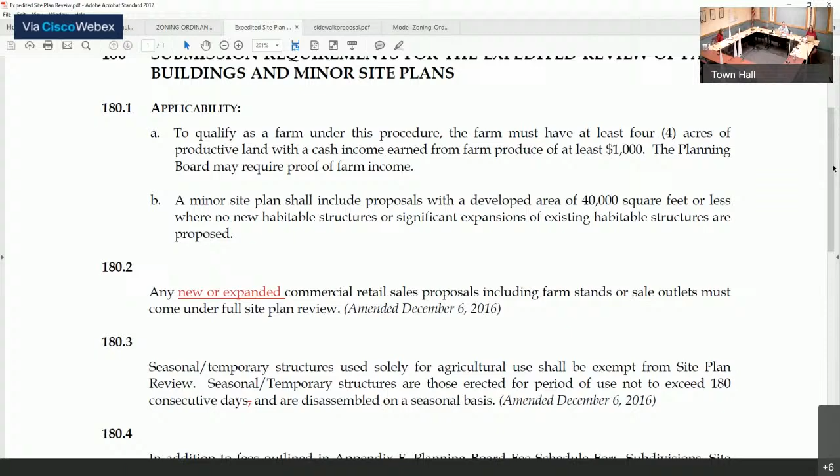And in terms of acceptance, so when we usually do a two-step process, we have the acceptance of the plan, and then we have the conditional approval. So at the acceptance level for an expedited review, are we looking just to, I mean usually we ask, have abutters been notified, fees paid, do we have all the plans that we need? Is there anything that isn't necessary or necessary to do that, or does that change?

That wouldn't change, because section 130, the submission procedures, and section 140, submission requirements, don't change at all. So you would still go through that process. It's just that there are fewer items that you would have to address in your application. So you still have to provide the abutters, you still have to provide a plan, you still have to meet all the requirements, the required renderings, you have to pay the application fee. So all that's still true. And there would be a vote for acceptance. They would still make their presentation, and then there would be an action on the approval. Thank you.

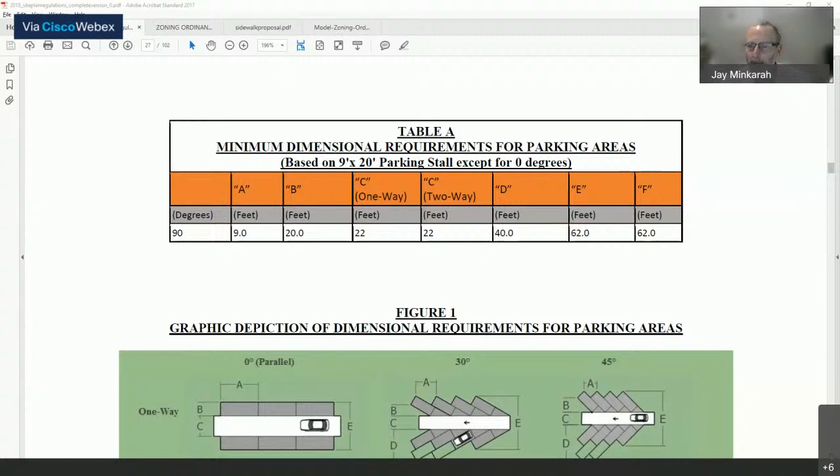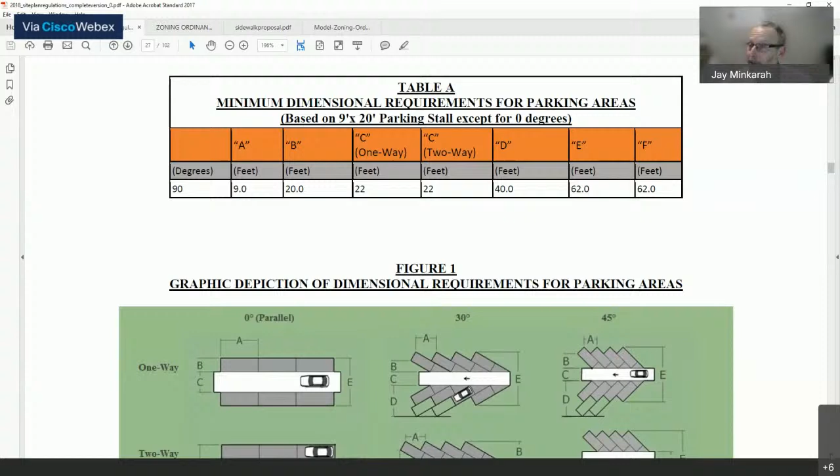And again, I'm happy to share this with everyone. If anybody does have a question as we're going through, and you don't have your regulations in front of you as to what Litchfield's current standard is, let me know, because I do have it open in front of me.

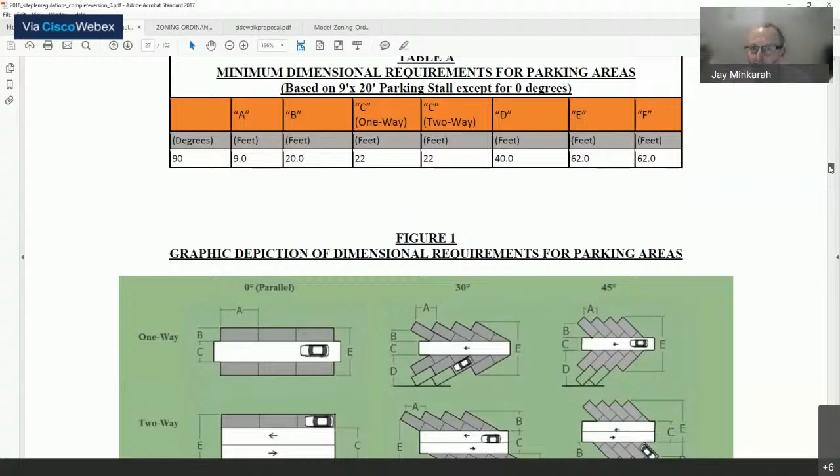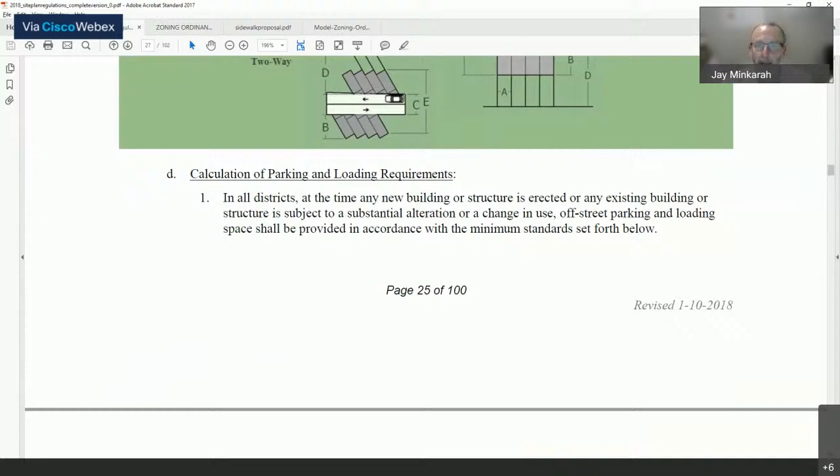Just off the cuff, I think the parking stall size is very similar. We also have some nice graphics on parking areas—maybe we could use some nicer graphics, but overall I think those make sense. I am going to scroll down through all of this until I get to their first tables on off-street parking. And just very basically, these are actually very comparable to the regulations we have now, so not a whole lot of change.

The one that does jump out a little bit is mixed use residential, which is a little bit different. That is not something we addressed.

These again, these are pretty typical as I'm moving through. And by the way, I've lost my visual.

Can people still hear or see me? Yeah, we can hear you, Jay. We can hear you, and we can see the table. Interesting, my active speaker box just turned blank. Anyway, that's probably my problem then.

Nevertheless, a couple here again that we don't necessarily address. Live work unit—maybe we care, maybe we don't.

Where I'm starting to go here, though, is I like how the ordinance in this structure, rather than listing out every single use—which is the way we do it—and providing a separate standard for each, even if they're the same or very similar, the way Londonderry does it is group a whole lot. So this is the categories: community gathering, assembly, membership, etc. They group basically everything that's going to be treated similarly in one category.

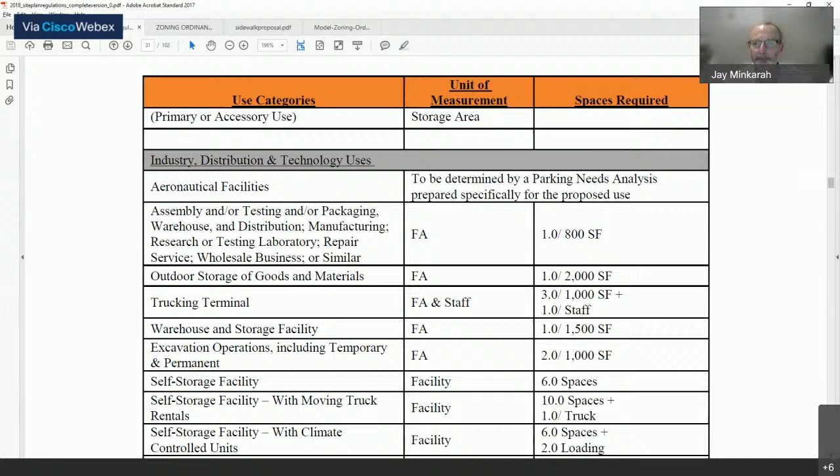The rest of these are pretty typical, I think, for what we tend to see—possibly on the low side, but to me these categories made sense. The industrial ones also, for the most part, I thought made sense. Again, you see this trend of grouping a whole lot of similar ones together.

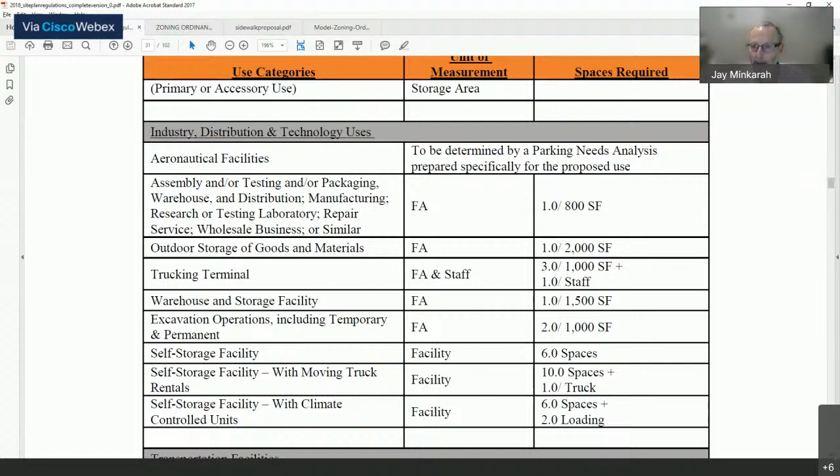Needless to say, I mentioned things that wouldn't make sense for Litchfield—aeronautical facilities probably being one of those. I don't know that we would ever see a trucking terminal. Maybe we would, maybe we wouldn't. I will say, I wonder if there isn't an error in a couple of these.

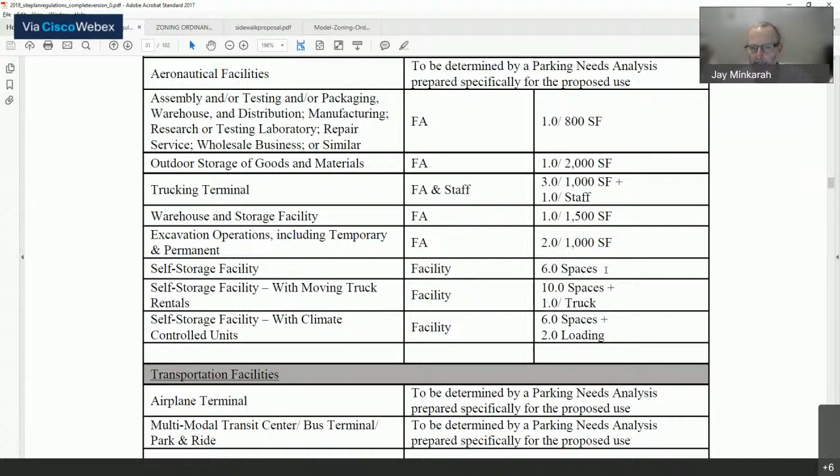Just this one jumped out at me—I'm going to try to clarify that with Londonderry. Self-storage facility, it's per facility and it's 6 spaces. I found that interesting, that there was no relationship to size. So I'm going to check to just make sure that there wasn't a missing word here. But nevertheless, those are the kinds of things we certainly will encounter. We have transportation facilities here, probably not.

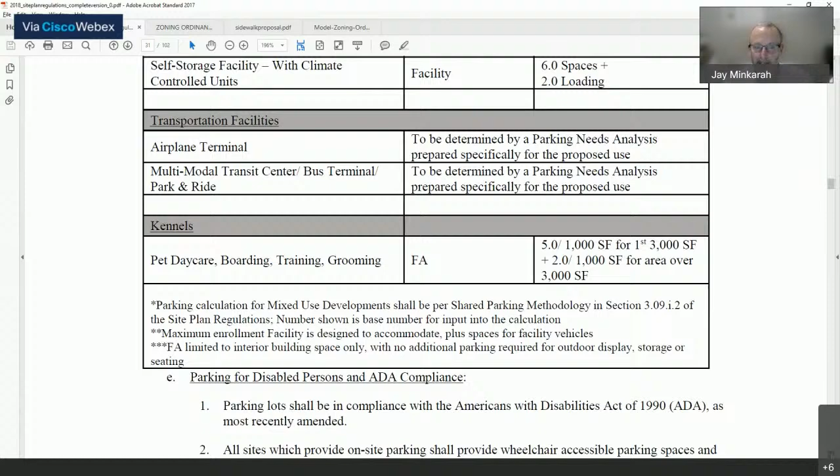So here are the asterisks that are just worth noting. What floor area means, it's limited to the interior space only. They do note there's no parking required for outdoor display space or storage area, so it's actually a little bit less. This is basically interior floor space, not necessarily gross area, for what that's worth.

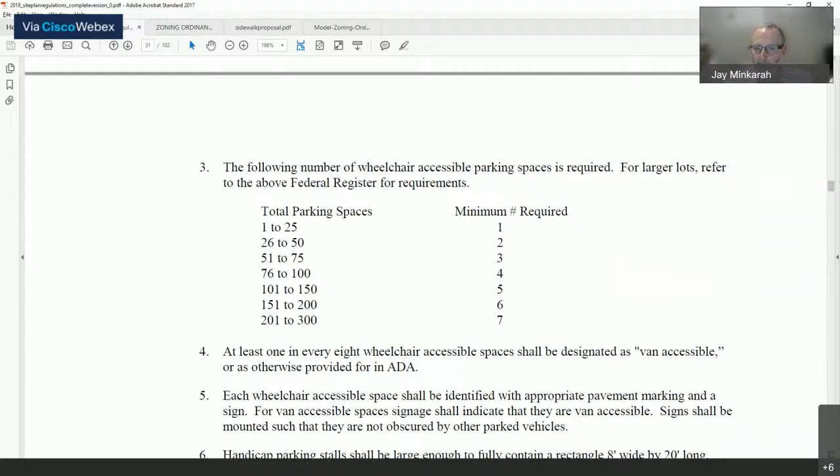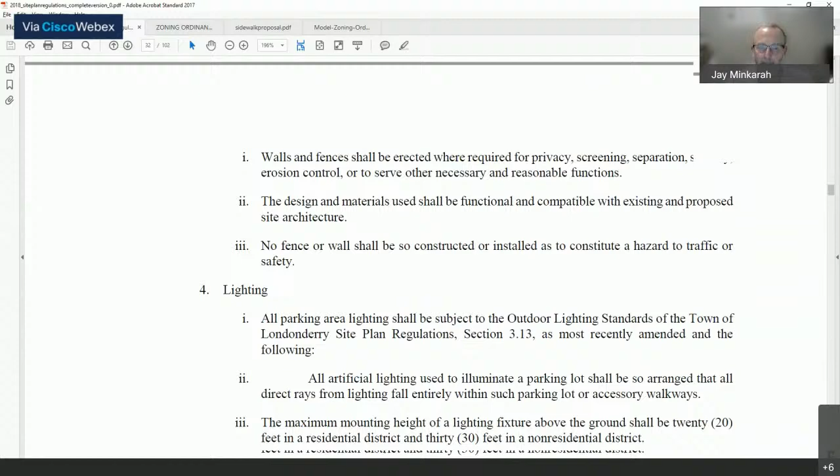They do go through ADA parking requirements—I'm not going to jump through those now, although I will compare them to what we have now. The section that I want to jump to, lighting, we do all of this. Actually, I think we do a pretty good job. So forgive me for zooming through all of these sections.

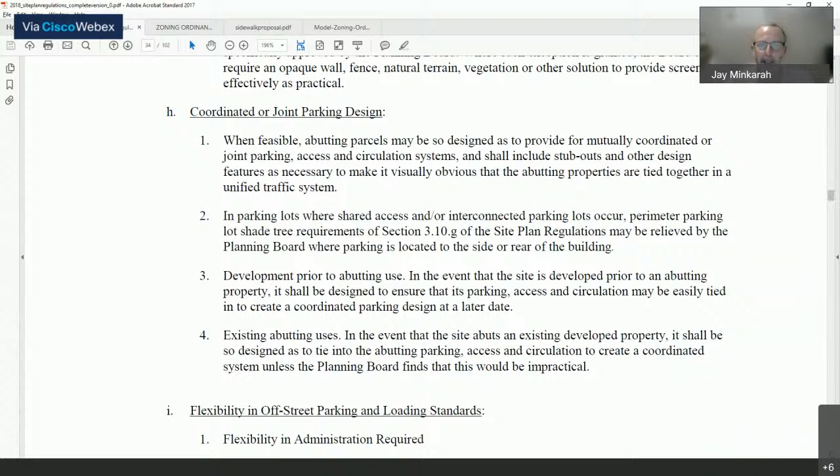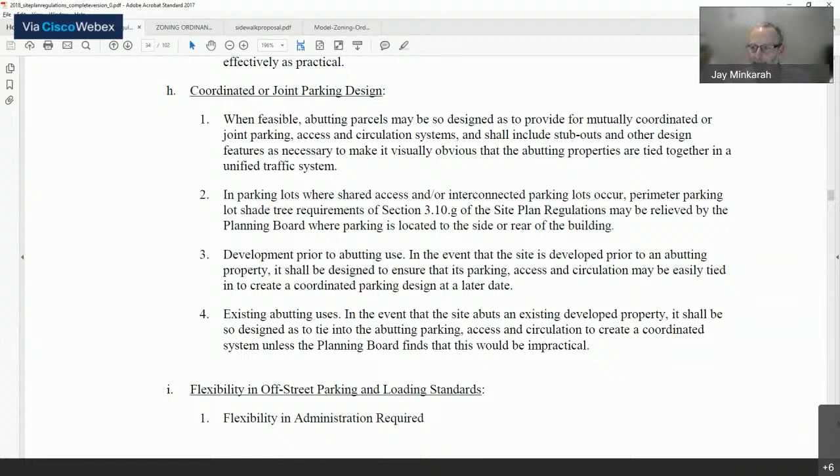So this was a section that jumped out at me—I thought it was interesting. Basically, this is intended to encourage abutting sites to share parking. That's often challenging, although it does happen in certain circumstances. But I think the key here is that they do provide an incentive for doing that. So again, something that we might want to look at, we might want to think about.

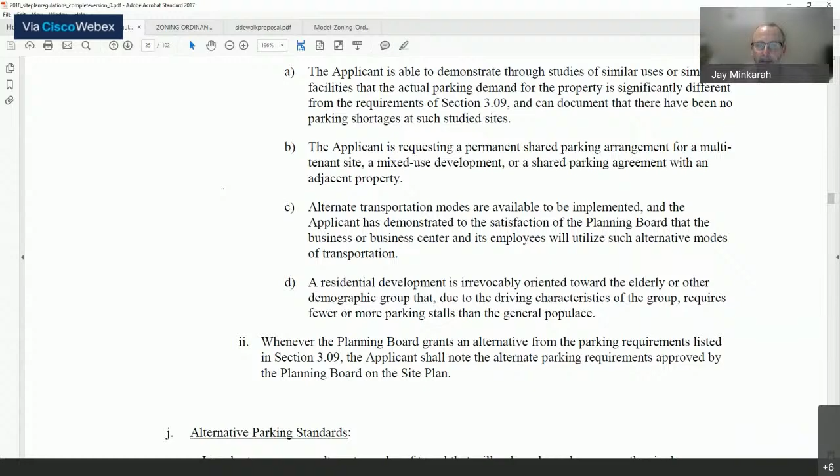And this is a section that talks about the calculation of flex spaces that relates to what I just referenced. I want to jump to—this is all very interesting, but I want to jump to a couple more things.

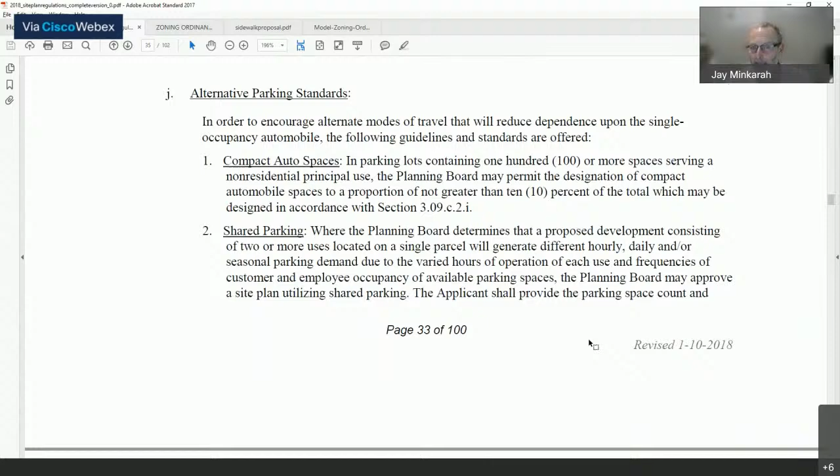First of all, there is a section on alternative parking standards. This is to encourage alternate modes of travel. I think this is really interesting and it's innovative—there's some parts of it I think that make sense. So previously I referenced that they want to encourage people to share parking. Here is a shared parking calculation that actually allows you to provide fewer spaces. And here again, compact auto spaces, they provide you with, in essence, a bonus for doing that.

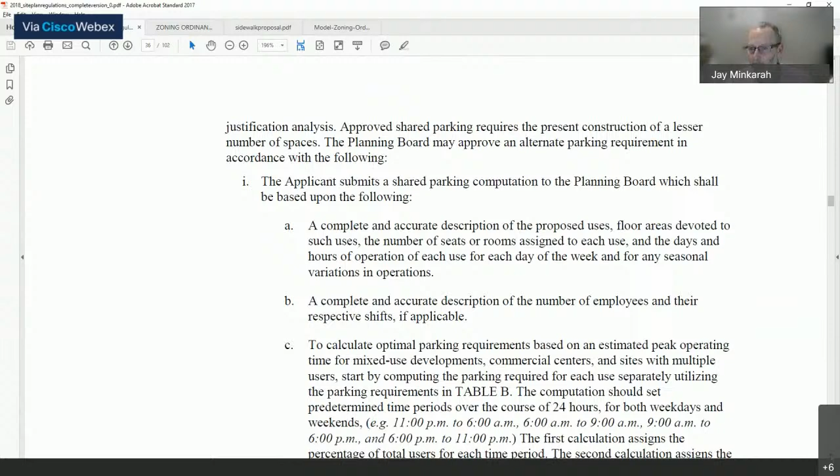And this is the section that—so I mentioned previously, if you have a multi-use site, how do you calculate? This is a section that allows you to do it. I do think it's a little overly complicated. End of the day, what you wind up doing is you add up all of the parking requirements for the individual uses proposed within a shopping center, in those high, medium, and low categories. And then what you're required to provide is at least two-thirds of that total number. So in other words, you get a 30% discount.

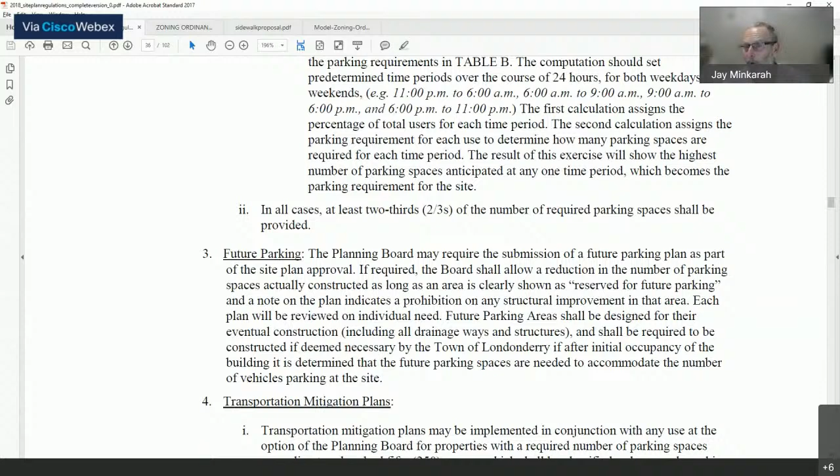And that really does make sense, because is 30% the magic number? I don't know. But it goes back to a prior point I made: when you have a multi-use site, you don't expect everybody to be coming to each of those uses at the same time all the time. You also do expect that it's not uncommon for somebody to go into a shopping center and patronize more than one store, but obviously they're only parking once.

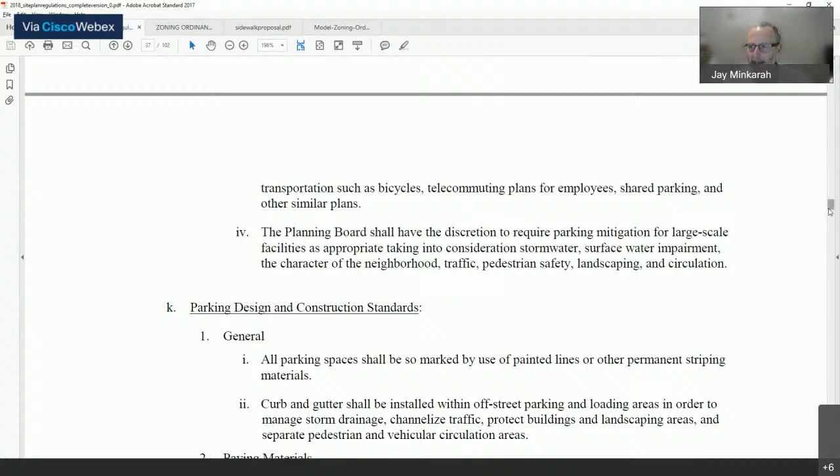A few here on future parking or showing future parking areas. There's a section in here on parking mitigation. That's interesting, and maybe it is something we want to look at. This is basically where you incentivize people to provide options like biking, telecommuting. They actually do have a section on bicycle parking that the planning board may require. Very interesting—I don't know that we want to go that far, but I thought this was interesting.

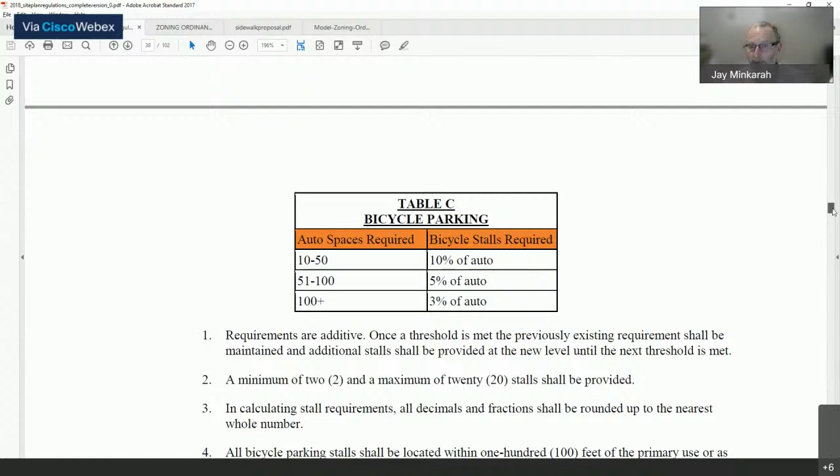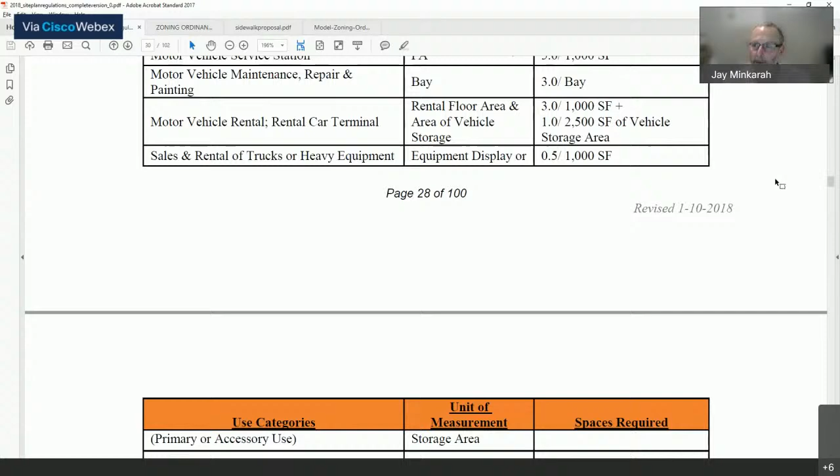If this is an approach that the board feels makes sense, what I would be happy to do is take our existing categories and fit them into a framework like this. I'm particularly interested in grouping them under high generator, medium generator, low generator, putting in a section for multiple uses, and then trying to get as much as possible boiled down to an objective standard like a square foot standard, and then pulling together a draft to bring back.

So I don't know if there's any thoughts or questions on this. Anybody have any questions for Jay?

I have one question—maybe it's not parking, maybe it's internal traffic control—but where you have, say, a row of shops like on 102 in Hudson, could you interconnect the parking lots so you wouldn't have to travel back onto Route 102 to get to the next location?

Yeah, I mean, I think you definitely could, and that's the kind of thing I think we've often wanted to encourage, especially on places like 102. I think the nice thing about a structure like this ordinance is that it actually provides an incentive to do that, in the sense that you can reduce your required parking. In retrospect it's less appealing than if you were developing something from the get-go, but I definitely think that's something we should be encouraging—that kind of interconnection.

Londonderry on 102, near Shaw's, where Verizon and Starbucks is, has an excellent idea, because you can't come out onto 102—you have to have that intermediate road.

Between Shaw's and Verizon—ideally you do it well. South Nashua has a number of interconnected shopping centers people may be familiar with, but the connections are not well signed, so you kind of have to be in the know. You can actually go through like 3 shopping centers connected to the Pheasant Lane Mall, but it's hard to figure out. Anything you can do to get people who can patronize multiple establishments on the same road, like 102, interconnected is so much preferable.

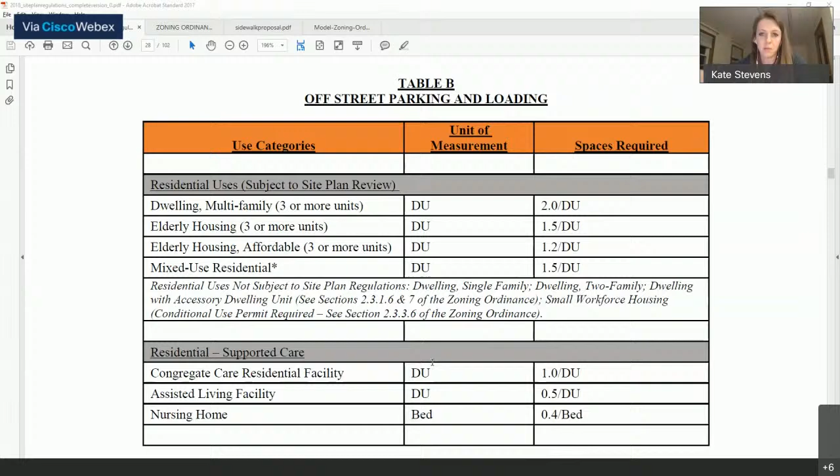There's something that we want to see. I think it's certainly an interesting way of looking at it. I think it makes it easier for the board's review of plans also. Instead of, how often is it that we go through our zoning regulations and realize, oh wait, there's a paragraph four pages up that we missed and maybe applies here and that sort of thing.

Go ahead, Jay. I was just going to say, if there's interest, I'll go ahead and take a stab at it and bring something back. Yeah, sure. Let's check it out, see how it jives with Litchfield.

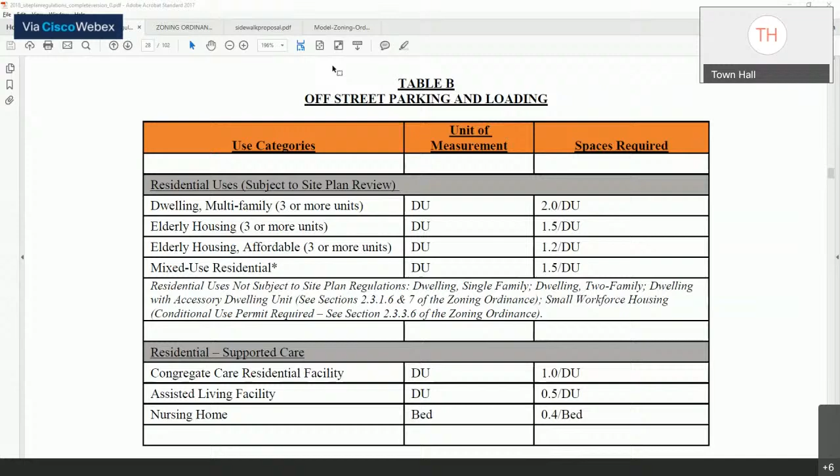All right, I've got one more, and I'm going to try to just switch while I am still sharing. Can everybody see this? Okay, so the last one I really want to touch on, there is one more on my list, but not for this evening. The last one I want to touch on, because it came up at our last work session, was looking at solar. Do we want to address, create a solar regulation or ordinance?

In this case, we actually do have a New Hampshire model, from what I'm assuming is the New Hampshire Solar Energy Association. They actually put together this document. It is fairly recent, as you can see, April of 2018. This really does provide a nice guide. This is something else I wanted to share with everyone.

I'm just going to go through it and hit on a few highlights. But I thought this was really fairly well put together. A lot of the illustrations are good. And again, some of this may make sense for Litchfield, some of these might not make sense.

I will say that one of the pushes out there in the solar world, you may have seen this or been familiar with it, is basically farm-friendly ground-mounted solar arrays being used as a way of allowing owners of farmland to gain income from the generation of solar energy, while still able to maintain their properties in agricultural use. There's a little bit touched on in this, but I thought that was interesting, and that's something we would have to deal with at a regulatory level.

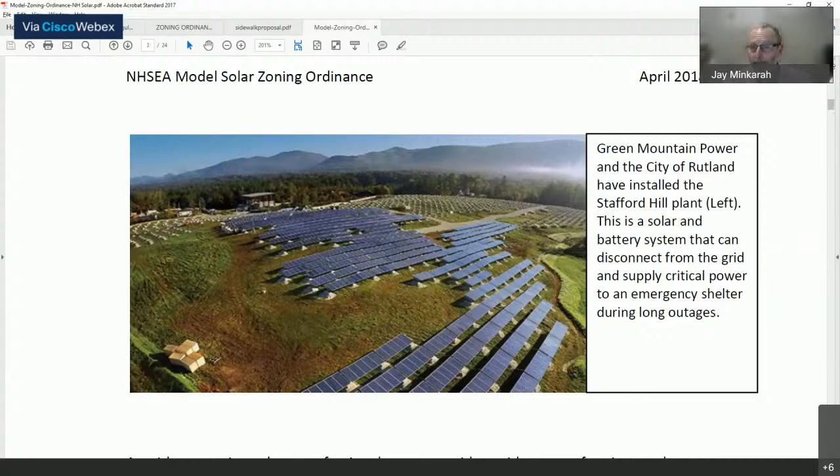Here's some basic things to consider, and that's important. Consider your community goals, consider why you want to take an approach like this. Is it just to allow homeowners to generate energy, or is it to allow for commercial scale solar? And what does that look like? Those are all things to think about.

I thought this was actually handy. I always struggle with when I hear a solar array is proposed and it's so many kilowatts or megawatts - what does that really mean? So I found this Solar Basics section interesting. How many solar panels would it need? What would be the size of a solar array necessary for a typical home? This actually tells you. I thought that was really interesting.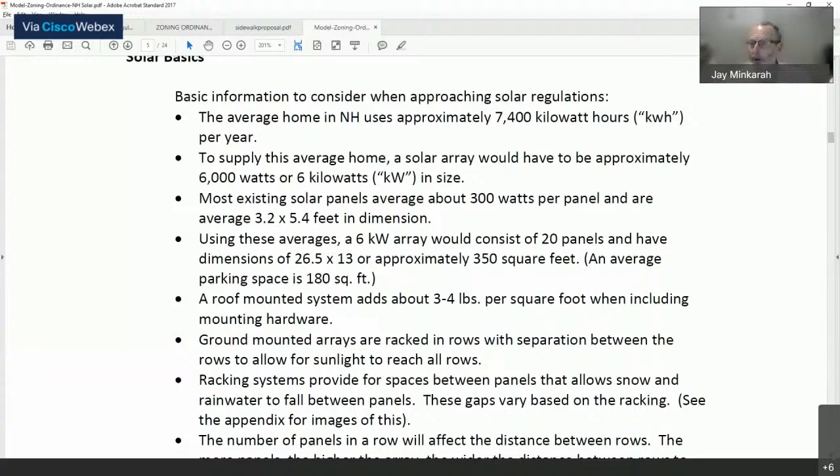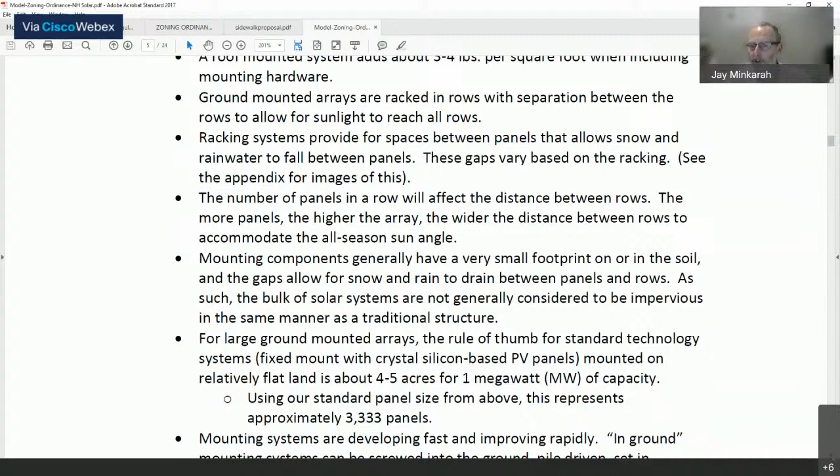But it's helpful, if not in an ordinance, to have this as background information, because it's the kind of thing people do wonder about and will want to ultimately be able to picture - what does it look like? So at any rate, just some general information that I think is important to know if this is an approach we want to take. And it goes through all the different types of systems.

This is a really helpful section on statutory authority and limitations. This is the kind of thing we want to take a look at in any ordinance, because it really runs through what was in 2018, the RSAs that are relevant. And I think these are all still relevant.

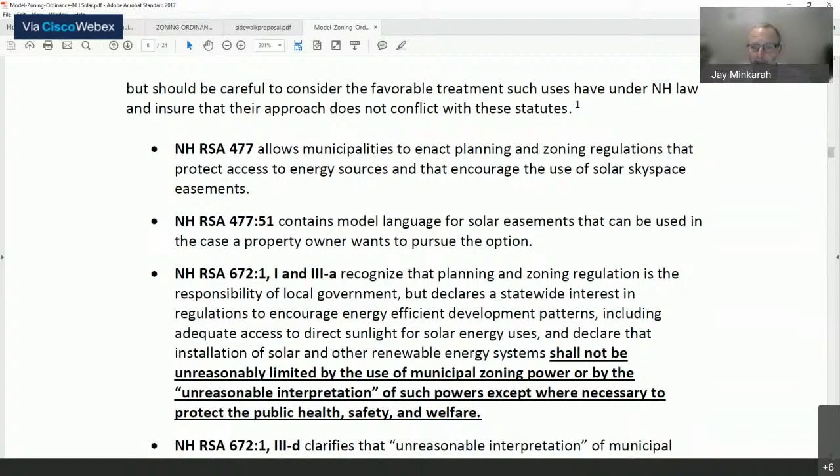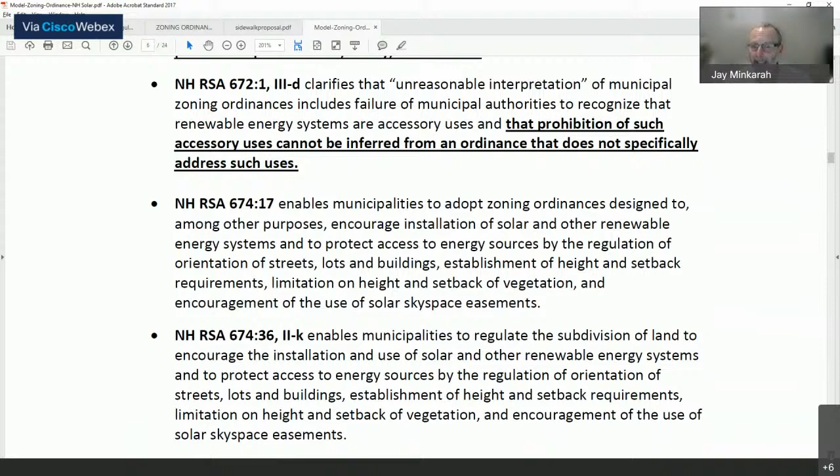I think, as we're probably aware, municipalities do have to allow for alternative energy generation, and you have the right to regulate it. You do have to allow it. What that means can vary, as you can see going through all of these. Say you have to allow it as an accessory use, not necessarily as a principal use. I'm not going to go through all of these, but the point is there actually are a few RSAs out there that do define what you can and can't do when it comes to regulating solar.

And then some of these aren't just can and can't do. Just backing up, I don't think Litchfield does this, but I could be wrong - whether we provide a tax exemption for solar energy systems, do we?

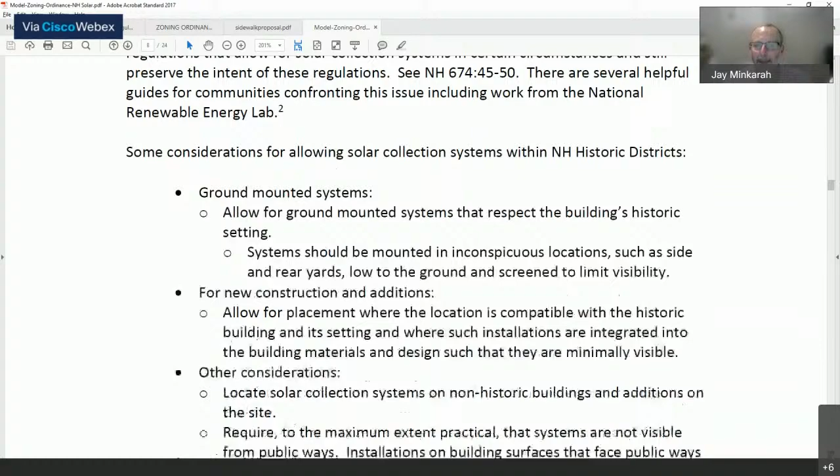This is a section that really is specific to historic districts, and Litchfield does not have historic districts. However, for those who are concerned about the visual impact of solar arrays, particularly in residential neighborhoods, or solar panels, there might be some portions of this that maybe provide good guidance for design considerations.

And then this document gets into the actual model solar ordinance. A lot of this, obviously, if we were to go this route, we would customize for Litchfield, both how it would fit contextually into Litchfield's ordinance in terms of section numbers, but also what makes sense. But I found this to be a fairly nice guide, the basic definitions that we would want to know.

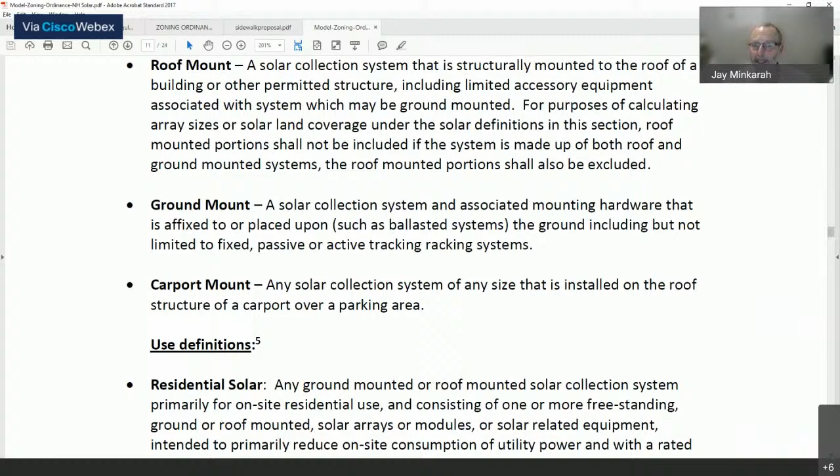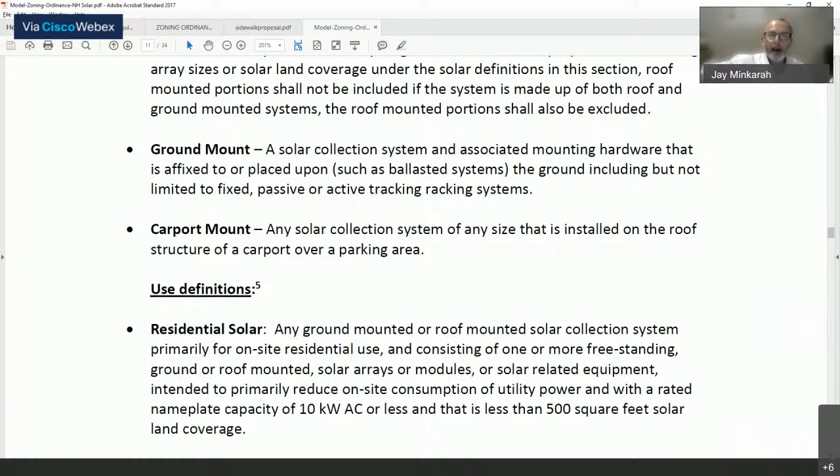A lot of these are industry terms that we may not all be familiar with. Going back to parking, this is an interesting one - if you've seen the carport ones popping up in a handful of places, those are actually dual benefit. They shade your vehicles, they keep parking lots cooler, and they provide solar energy. They're also expensive. So, again, we don't have to go through all of these right now, at least, but you certainly can at your leisure.

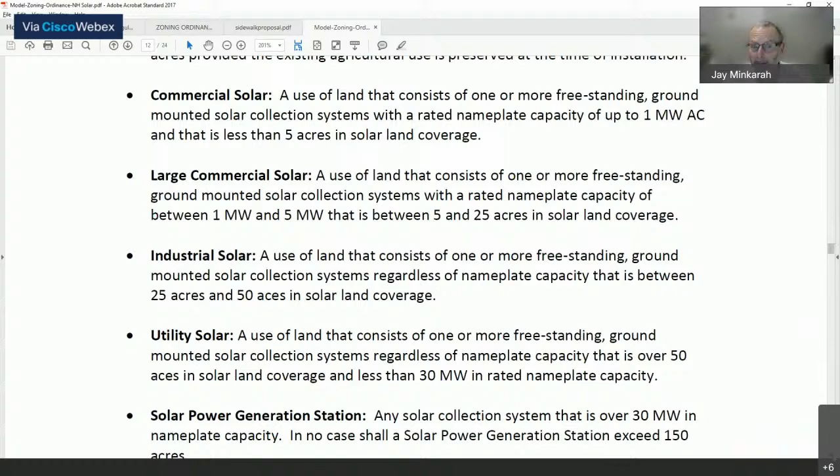And this is also one that jumps out at me for Litchfield, which is primary agricultural solar. This is basically that scenario where you're allowing commercial grade solar on an active farm, provided the existing agricultural use is preserved at the time of installation. So significant. But again, these definitions all make sense - they're all common.

And then they provide a matrix of where it's permitted. Obviously, all of these zoning districts are not applicable to us, but this is certainly adaptable. And then they go into specific requirements. The value of this, and we can all do more research on this to the extent we want, is that they've already done a lot of research around best practices that inform these requirements, and that's really helpful.

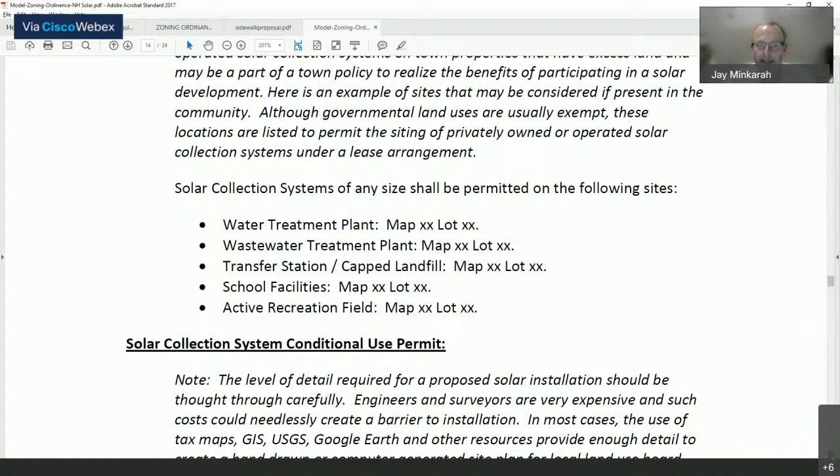I'm not going to go through all of these, I'm just kind of going over what makes sense. By the way, reclaimed gravel pits and quarries are great sites. Old landfills are great sites. Extra municipal land, those are also great sites, as are rooftops.

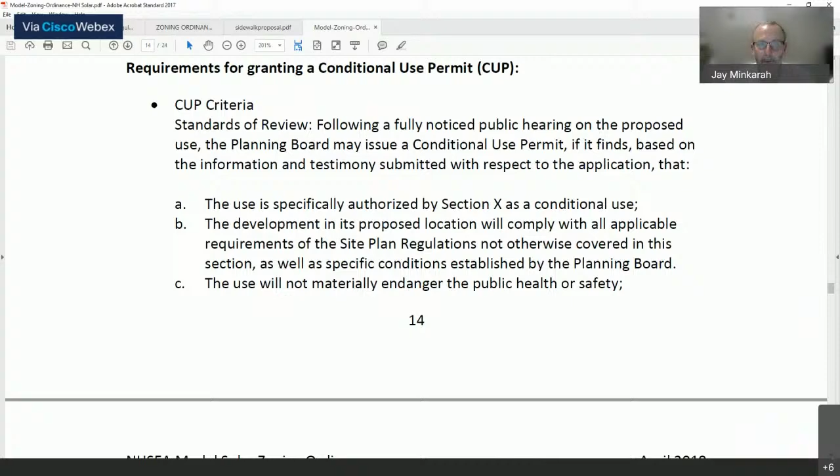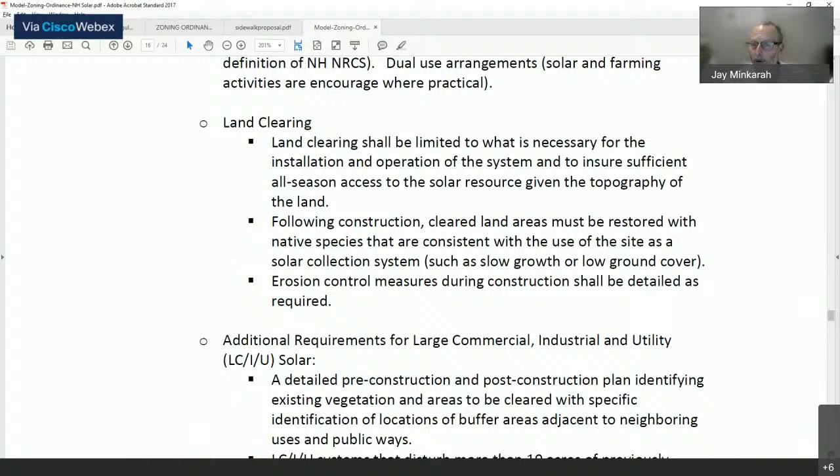So at any rate, there's a conditional use permit process that's laid out. A lot of these are the typical kinds of regulations I think we would expect. But for somebody like myself, who I'd say I know a fair amount about zoning, I don't know a lot about solar energy equipment installation and the different types. So I found this guide to be really helpful. A lot of things to think about.

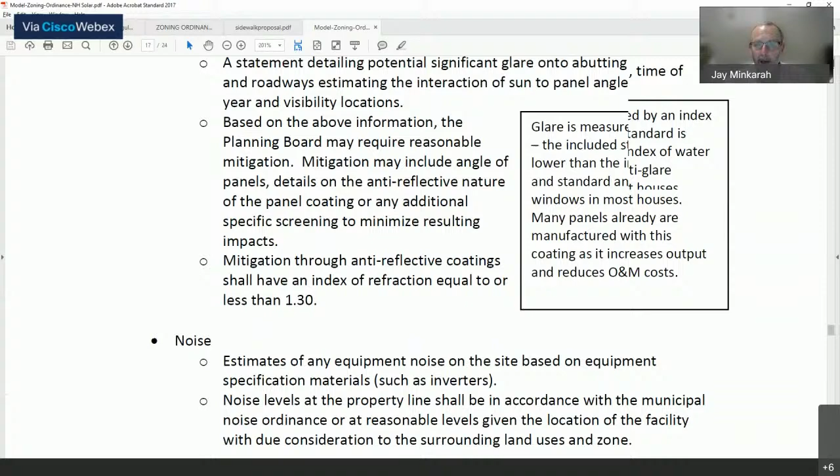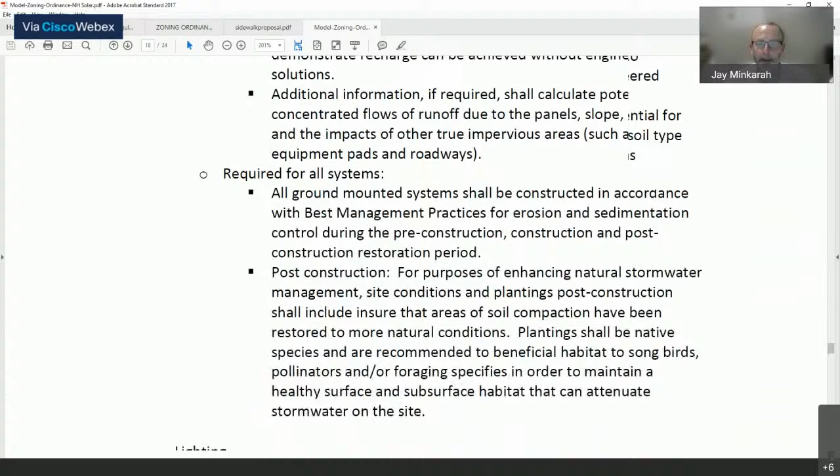Glare is an issue I know that comes up. It can particularly be an abutter concern, so that's addressed in here. Noise, I can't imagine so much. Stormwater, actually, that's also an important one to consider because obviously solar panels are impervious. So again, I'm not going to run through all of these.

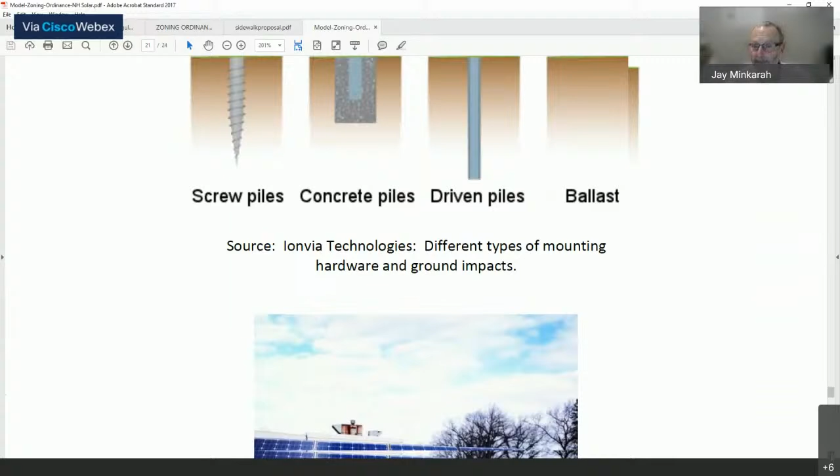What's nice here too at the end is that they show some different examples. Abandonment, that's also a significant issue that has to be addressed. We get into a lot of good detail here. And then you show some of the different ways this is done. So gaps is something you want to provide, just an illustration of how it's done properly.

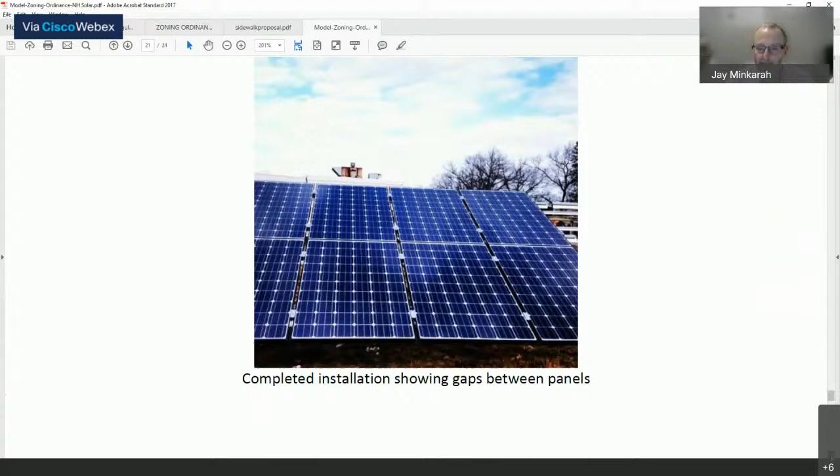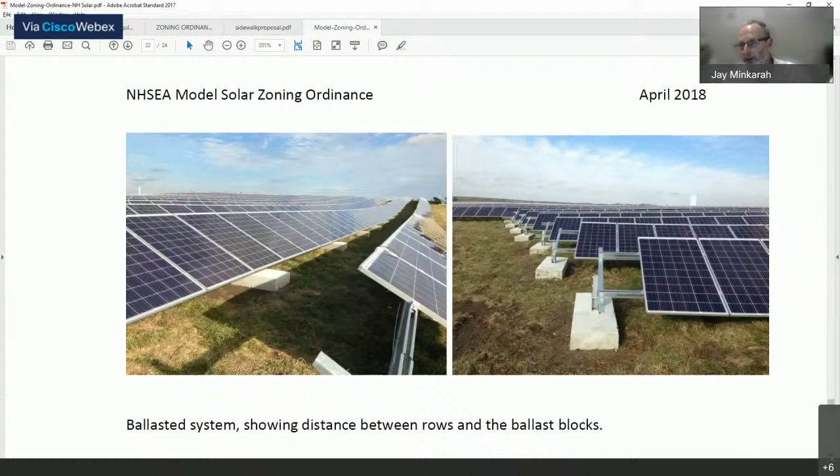Here are a couple of different examples, or different perspectives on the same ground-mounted system. Again, these are terms that would be defined in the ordinance, and now you've got some images showing you what's meant.

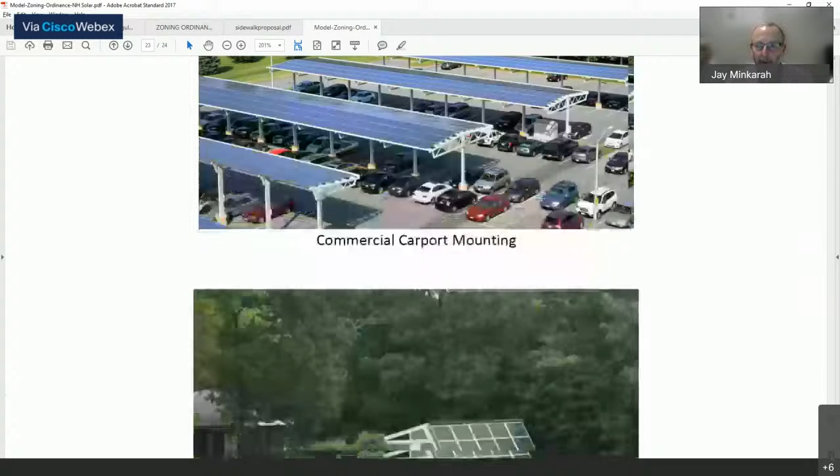Again, a totally different type of what they're calling racking equipment, a racking system. That's often used for agriculture. I mentioned the carports - that's an example of what those look like. This is just a residential ground-mounted system. Residential ground-mounted systems tend to be the most controversial.

This model ordinance, like most, suggests, as I think most of us would agree, that roof-mounted solar is something that should be permitted by right. Sometimes people don't like to look at it, but that's generally accepted. Ground-mounted can be controversial, particularly if they show up in people's front yards.

This does not show off very well, but there are pole-mounted systems in the back here, shown on an active agricultural site. Here's another example of a ground-mounted system on a residential site. Again, these have been controversial in some communities.

A community, and I'll share this with everyone also in the region, that has adopted an ordinance that is pretty good is Hollis. And in part that was done because these were showing up in people's yards and it caused controversy. At least in one case, it was a front yard. And so that did get people upset, and that prompted the town to take a look at adopting an ordinance. So overall, I thought this was really a pretty good example.

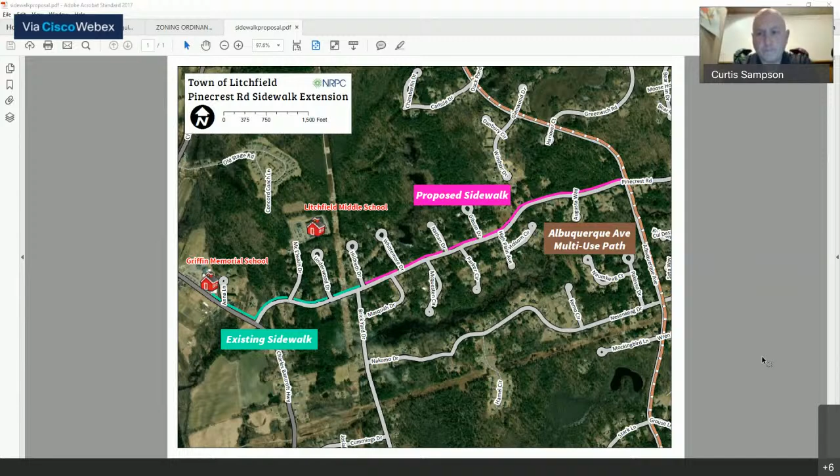Yeah, it ties to the CIP plan, right? Yeah, it's mentioned in the CIP as well.

I'm perfectly happy to draft something if the board wants to go that route. If you think it's worthwhile, I'm happy to do it. I think it's a great thing. I can speak from experience living right there that there's a lot of pedestrian traffic, and even people coming from as far as Canberra on the other side of Albuquerque walk up that way. It would be nice to connect Albuquerque to have another access.

It gets all the way to the high school, you get all the schools. There's also Canberra, one of the senior housing areas, which would even just about connect them to Albuquerque, down to Pinecrest. I almost wish it went further down Pinecrest, because I do see a lot of senior citizens walking, especially between Pinecrest and Albuquerque on the east side.

Can you guys hear me? Yes. Okay, I didn't test my microphone earlier, so I wasn't sure if anything I said was actually there. Oh, we can hear you.

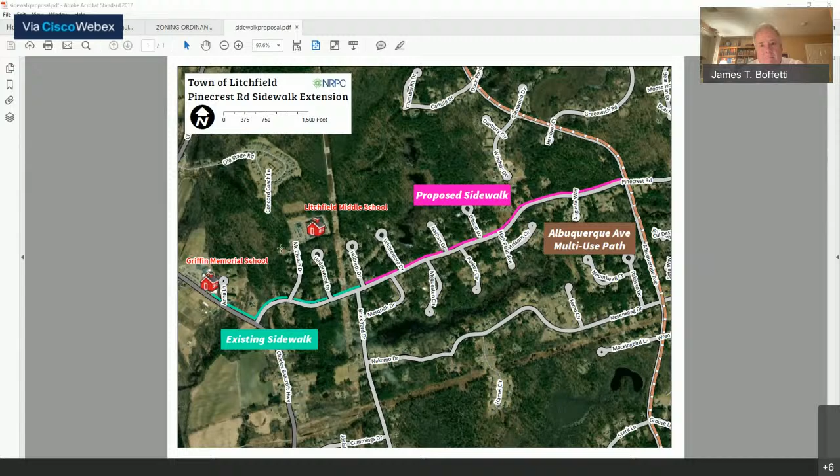No more discussion. Any further discussion? All those in favor of a letter of support from the planning board for the Pinecrest sidewalk grant application, please signify by saying aye. Aye. Those opposed? Those abstained? Motion passes, 6-0-0.

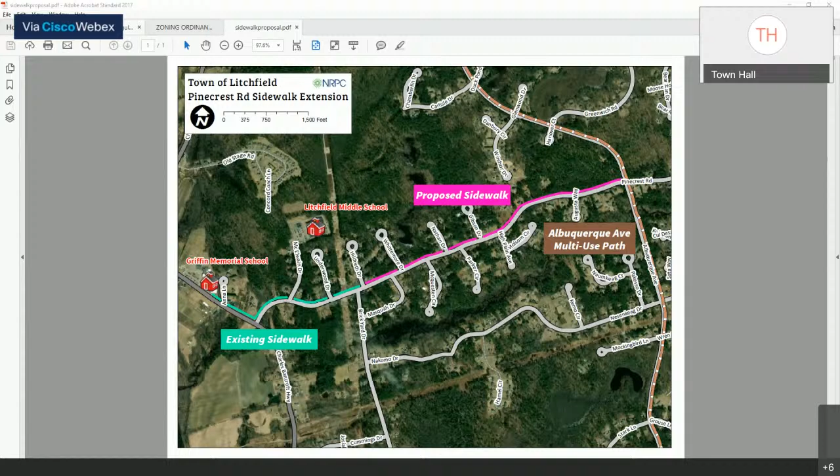Okay, and do you want me to reach out to Troy tomorrow? Is Jay still there? Yeah, Jason. He looked frozen there. That's all right. I'll reach out to Troy and CC you about this as well, right?

Okay, that'd be great, because the board doesn't meet till after Friday, so let him work on this, right? Yes, and I think he was thinking he would just write something based on the last vote the board took. Okay, very good. All right, so we'll get that to you, Jay. Thank you.

All right, moving on, committee reports. Any reports from any committees? Kim, did you have anything about NRPC?

Conservation Commission met at the beginning of the month, first week of the month, March 4th. Next meeting is April 1st. I wasn't at the March 4th meeting. I was actually at the Lower Merrimack River Local Advisory Committee Zoom meeting, which was held on that same night, so I had a bit of a conflict, but I attended that one.